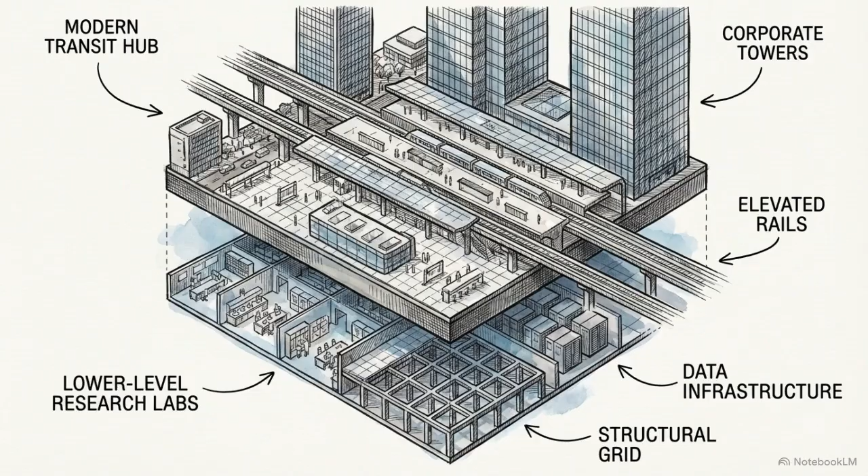For hardware developers, proximity is survival. This station provides a direct zero-transfer line to the heavy manufacturing floors of Nagoya and Osaka, allowing engineers to physically interface with their supply chains in under 2 hours.

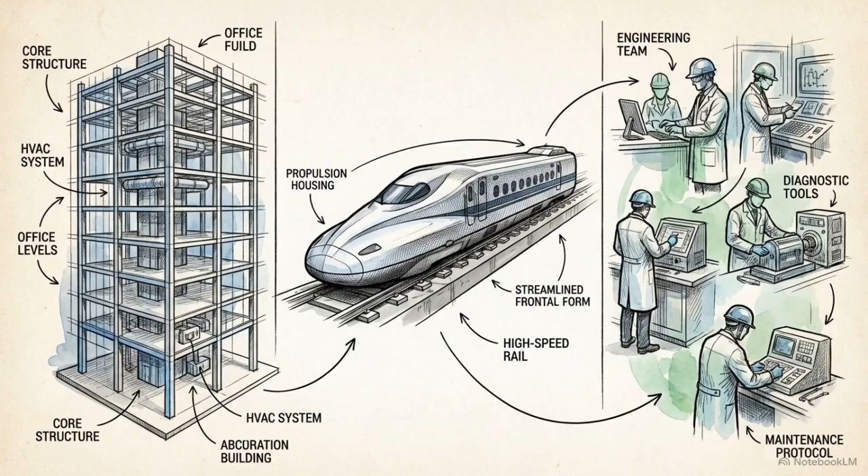Comparing operating expenses reveals a structural advantage. Shin Yokohama rent is exactly 60% of the Tokyo baseline. Combine this with localized talent data: Yokohama houses over 140,000 engineers, forming a dense labor pool directly overlapping the transit hub. Access to lower rent, high-speed rail, and thousands of engineers completely alters the capital equation.

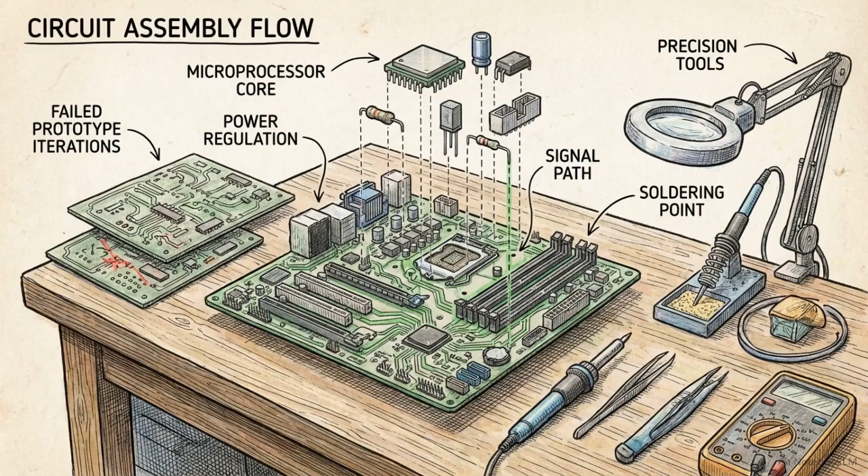Geographic arbitrage provides the liquid capital required to finance the development of next-generation hardware. Developing deep tech hardware is notoriously expensive. Small and medium-sized enterprises, SMEs, face a continuous burn rate, requiring massive capital investment just to prototype their designs.

The operating expense saved through Shin Yokohama's geographic arbitrage is immediately reallocated into hard tech R&D. Companies fund new clean rooms, purchase specialized testing equipment, and retain elite technical talent. The result of that localized spending is a complete industrial internet technology stack, compressed entirely into a single transit district.

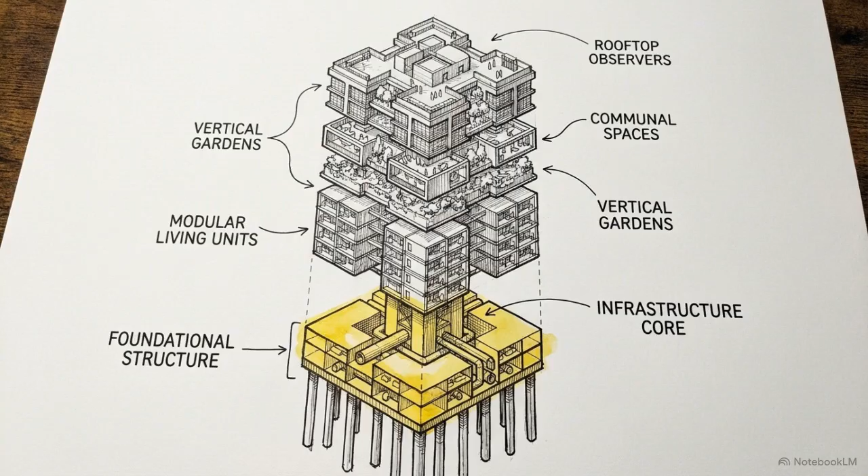While many tech hubs are dominated by a single monolithic corporation, this landscape is populated by independent, highly specialized SMEs. To understand how this decentralized engine functions, we will deconstruct this cluster by building its technology stack from the ground up, layer by layer. Geographic arbitrage lets these companies physically build the entire hardware stack within a single square mile.

A decentralized tech cluster immediately faces a structural problem. Highly specialized, isolated hardware vendors need a way to access and integrate complex global intellectual property without maintaining massive international procurement teams. The solution is a routing layer.

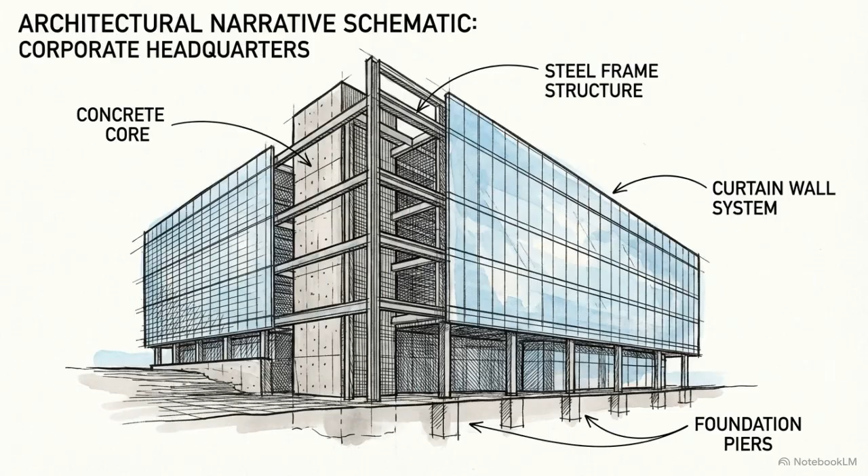In Shin Yokohama, that layer is anchored by Macnica, a technology trading company that commands a 22% domestic market share in semiconductors. Macnica relies on field application engineers.

The Macnica building acts as a central hub, receiving raw global IP packets. These engineers translate and customize the complex specifications, then rapidly distribute this localized IP outward, feeding it directly into surrounding Japanese manufacturers and system integrators.

This continuous outward flow of advanced components creates a gravity well. It pulls testing facilities, certification services, and specialized board design firms directly into the surrounding office buildings to support the integration process. Field application engineers operate as the high-bandwidth routers of the ecosystem. They take a fragmented collection of independent vendors and synchronize them into a highly functional supply chain.

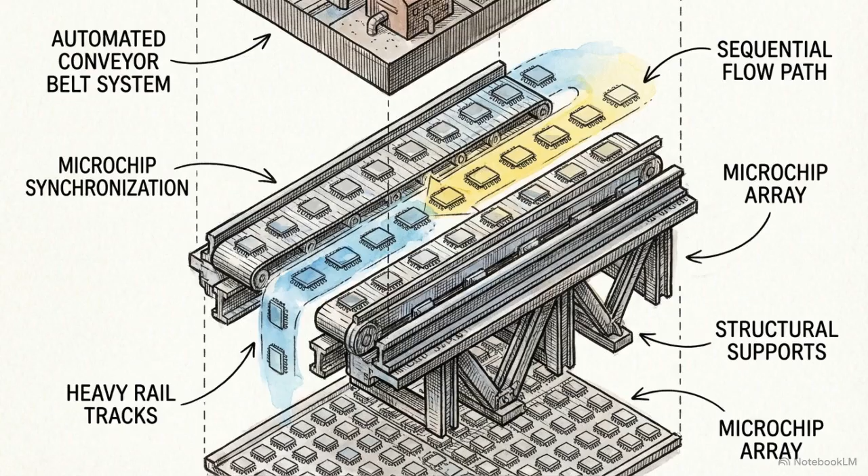While traditional memory traps electrons, FeRAM uses physical movement. Apply an electrical field, and zirconium and titanium positive ions physically shift across the lattice barrier. Because these ions lock into their physical positions, the memory is non-volatile. Even if the system loses power entirely, the data remains intact.

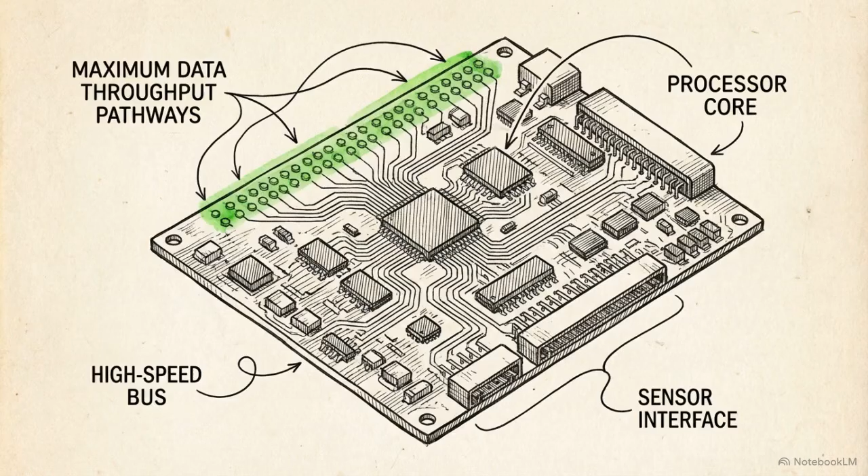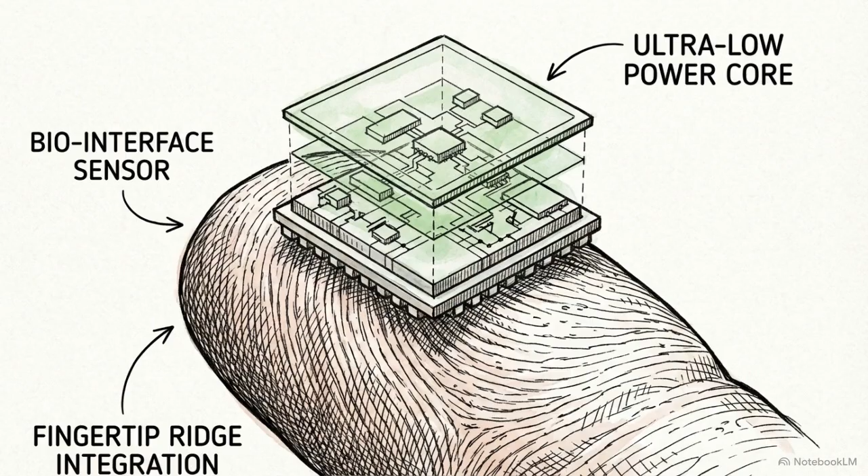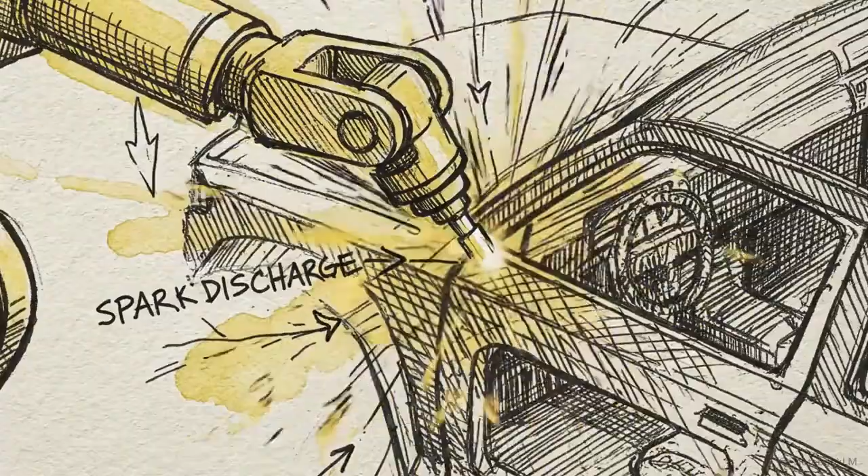Alongside FeRAM, RAMXEED develops parallel resistive RAM, or ReRAM, engineered for extreme low power draw. It consumes a mere 0.15 milliamps at 5 MHz. These specifications are mandatory requirements for continuous, battery-less data logging in devices like smart meters and industrial robotics, where replacing a power source is either impossible or cost-prohibitive.

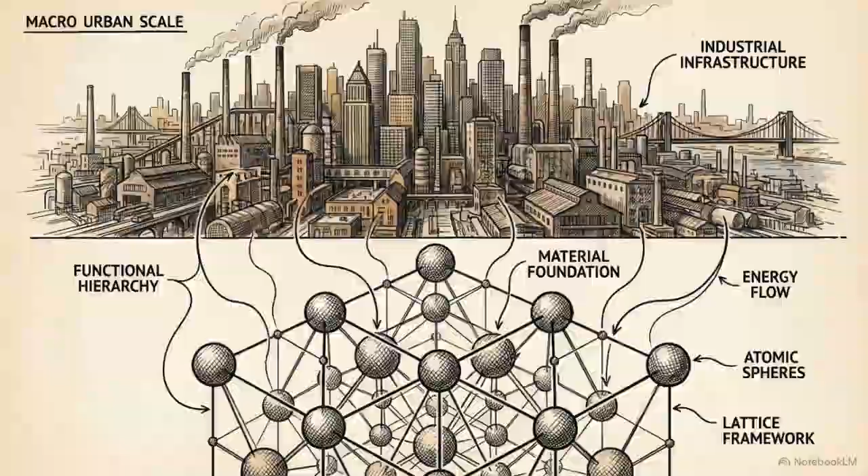The entire cluster's ability to process data at the edge relies heavily on the quantum-level manipulation of crystal structures to solve physical data retention bottlenecks. High-end memory is useless if the physical connection to the motherboard fractures under stress.

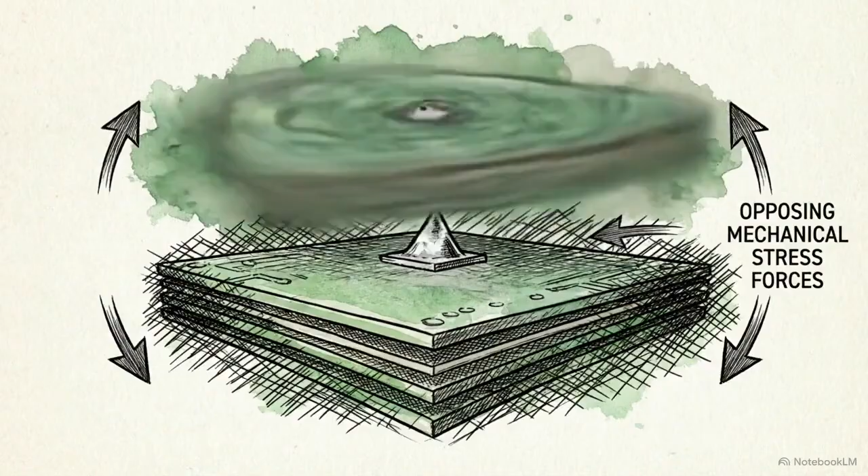This brings us to the mechatronic layer. Automotive and industrial environments are hostile. High-frequency vibrations constantly threaten the physical integrity of every soldered joint and silicon component. To prevent mechanical failure, Iriso Electronics developed the floating connector.

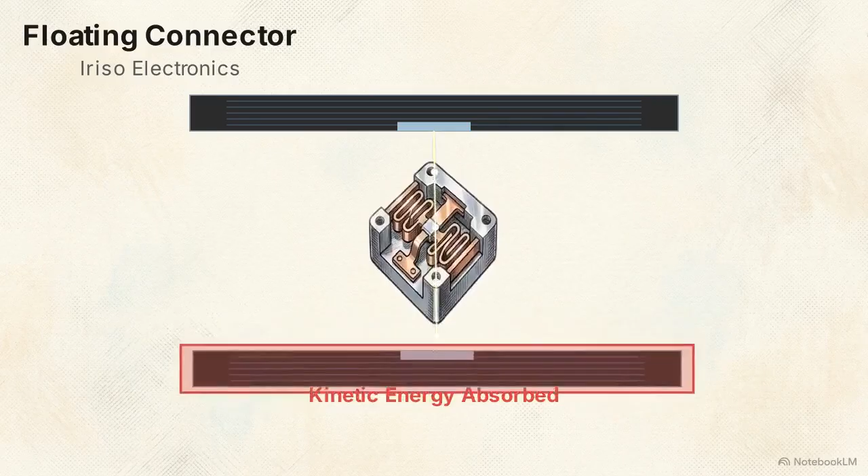Here we see its 3D cross-section bridging two circuit boards. As the bottom board vibrates, the flexible internal joint absorbs the kinetic energy. It flexes independently, keeping the top connection perfectly stable.

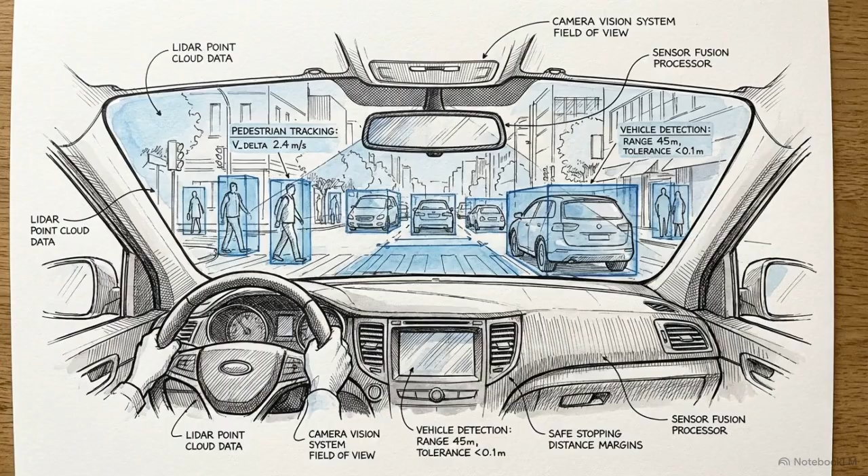This exact mechatronic tolerance is specifically required for advanced driver assistance systems, where a dropped signal from a fractured pin could result in a high-speed collision.

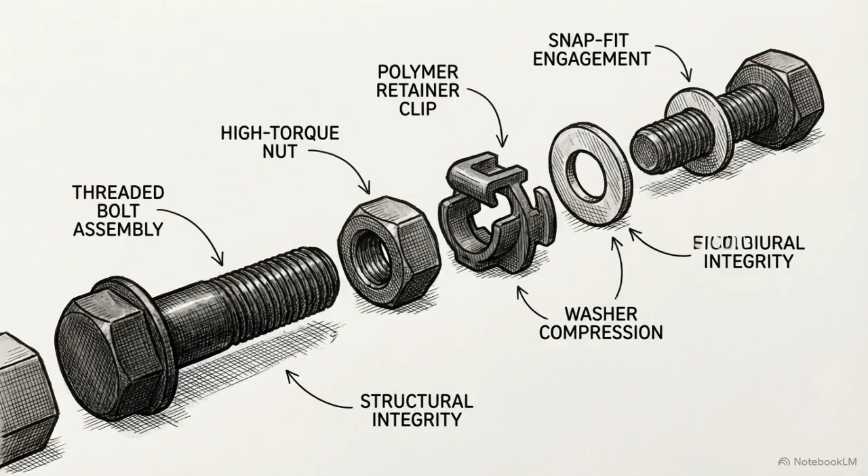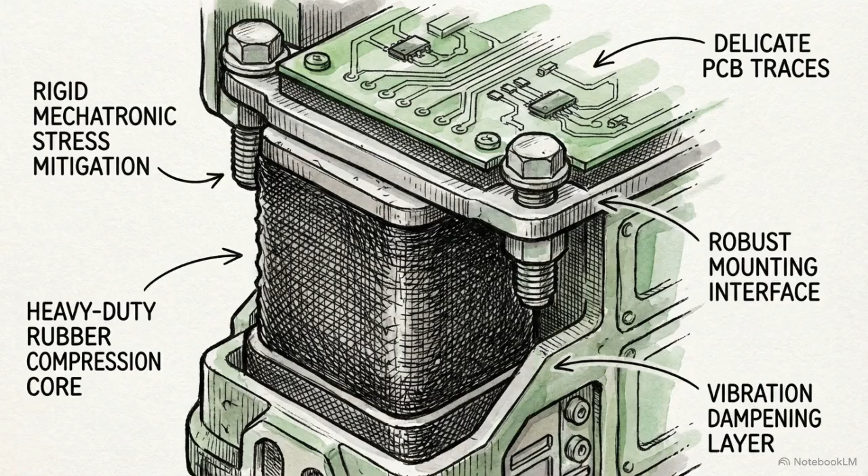You can see this hardware alignment across the district. NIFCO, a company traditionally known for industrial fasteners, placed its global R&D office right here to manage their transition into integrated smart components. Software reliability in the physical world is entirely dependent on rigid mechatronic stress mitigation.

Moving upward in the architectural stack, we reach the data processing stage. Hardware generates raw physical signals, but a dedicated software layer must compile that data into usable value. AcroQuest technology operates as the intelligence layer for the cluster, taking responsibility for making sense of the hardware output.

Their EndoSnipe platform ingests massive arrays of sensor data. Raw data flows from the physical layers below, moving upward into a structured interface. The logic automatically filters the stream, flagging anomalous spikes in red before they hit failure thresholds, optimizing energy consumption.

Shin Yokohama's software layer is also built for immense scale. Neo Japan, a highly prominent firm in the district, developed a groupware platform called DeskNet's Neo, which currently supports a user base of over 5.3 million people.

Neo Japan illustrates the extreme organizational efficiency possible here. They generate massive recurring revenue streams while maintaining a tight, streamlined workforce of roughly 300 employees.

The top of the stack acts as a translation engine. It turns raw physical signals into actionable, scalable enterprise logic. Zooming out, we view the completed vertical architecture. The stack routes from Macnica to RAMXEED's memory, up through Iriso's connectors, and into AcroQuest's software.

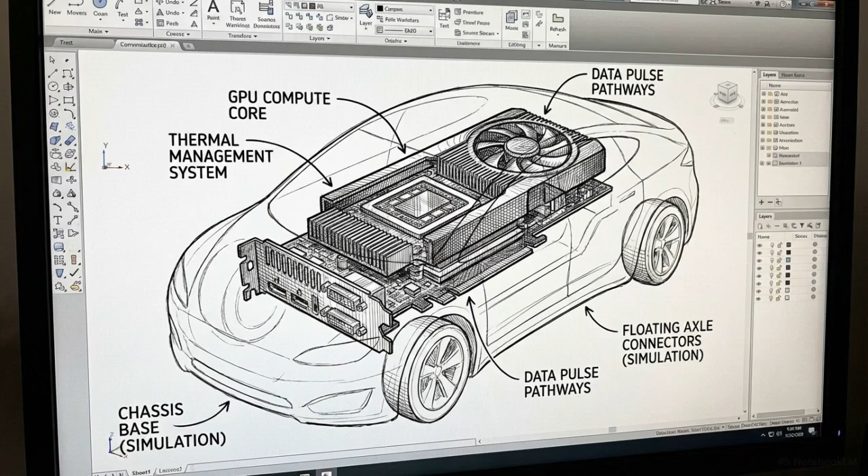Because this stack is so tightly integrated, massive international tech giants embed themselves here to access this localized intellectual property. The British semiconductor design firm ARM maintains a presence in the district with a highly specific mandate, deploying specialist teams to design automotive GPUs for next-generation mobility platforms.

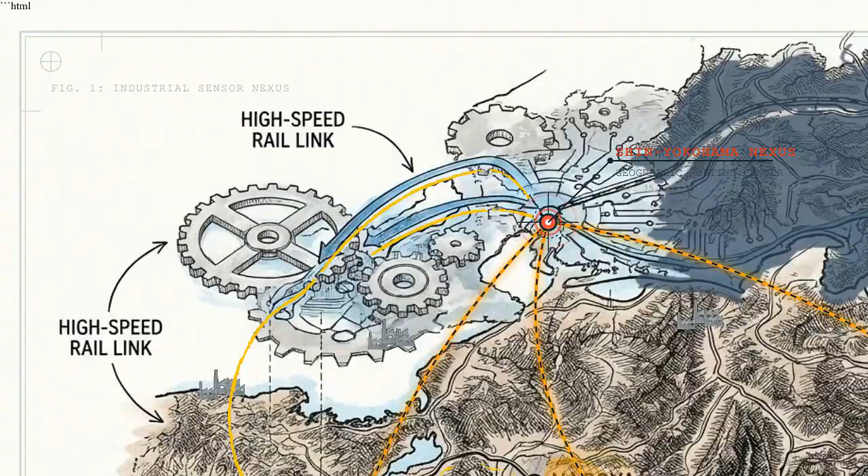Sensata Technologies established a global business center here for similar reasons. They use Shin Yokohama as the geographic nexus for automotive sensor integration across the entire Japanese manufacturing sector. Global tech giants embed core research and development teams here to physically interlock with the SME stack.

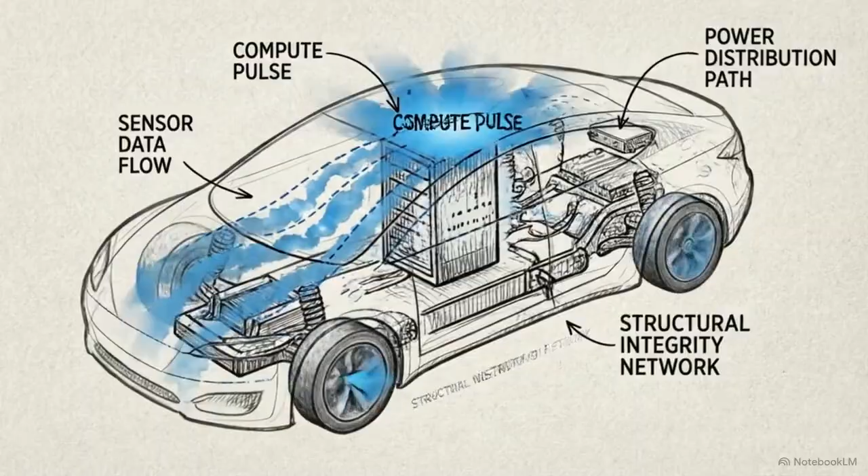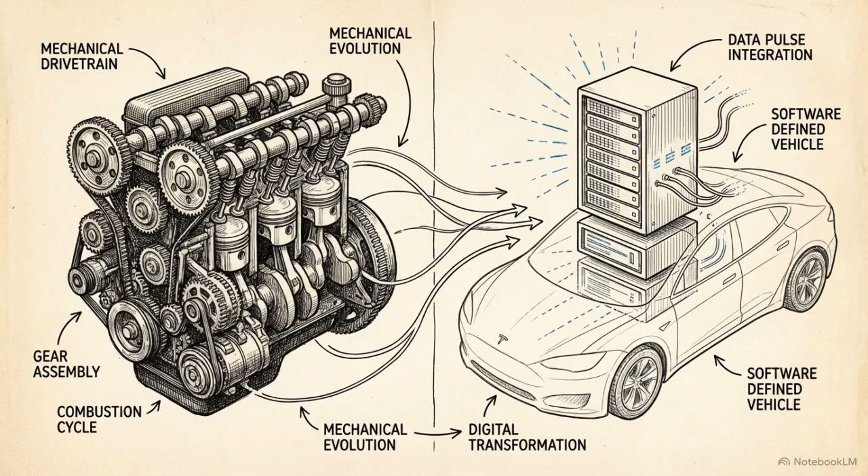The ultimate output of this ecosystem's convergence is the software-defined vehicle, or SDV. An SDV represents a structural shift in automotive engineering. Vehicles are evolving from primarily mechanical machines into rolling server racks, where software dictates the vehicle's entire functionality.

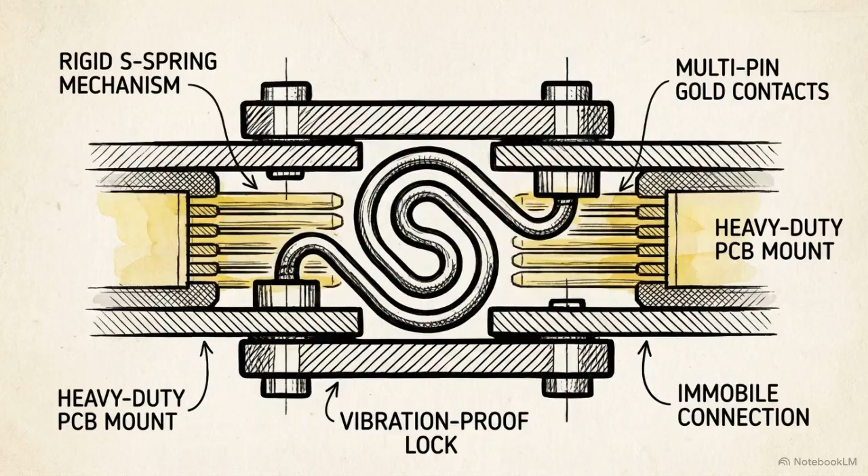These vehicles cannot function in the real world without the exact layers we just explored. They require vibration-proof mechatronics, extreme endurance edge memory, and flawless real-time processing pipelines.

Institutional frameworks like Tech Hub Yokohama and iTop Yokohama are actively accelerating this process. They act as matchmakers, pulling these highly specialized layers into global pilot programs and real-world testing.

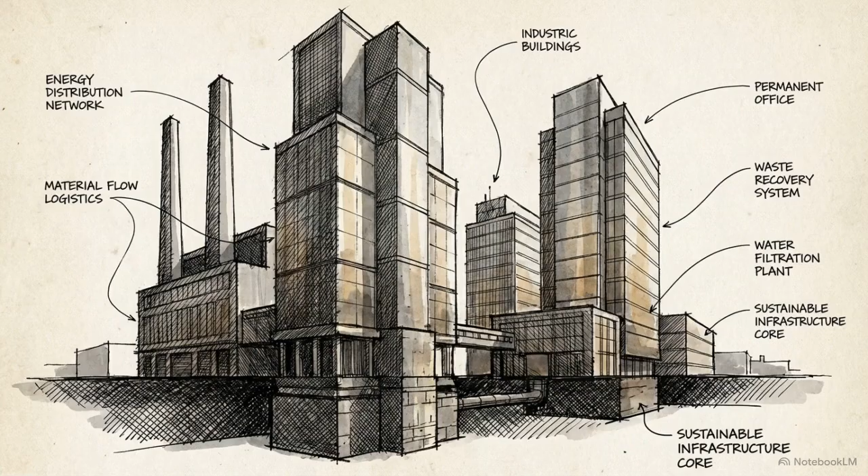Future technological dominance will not belong solely to abstract software monopolies. It will belong to dense physical ecosystems that have mastered the unabstractable mechanics of the real world.